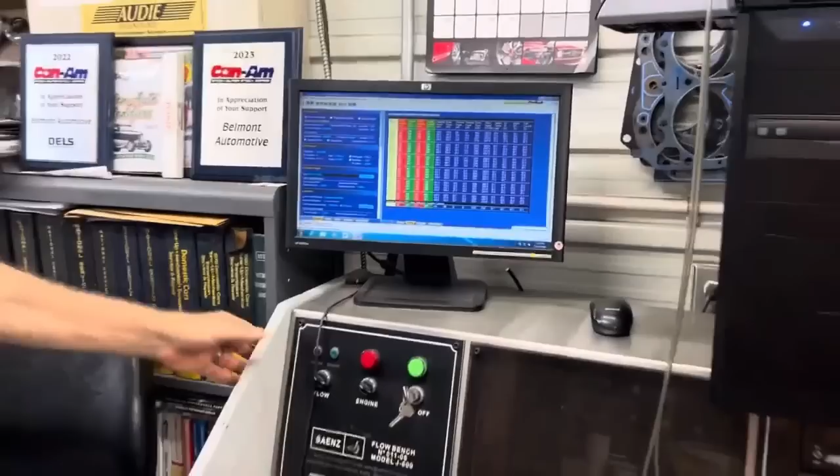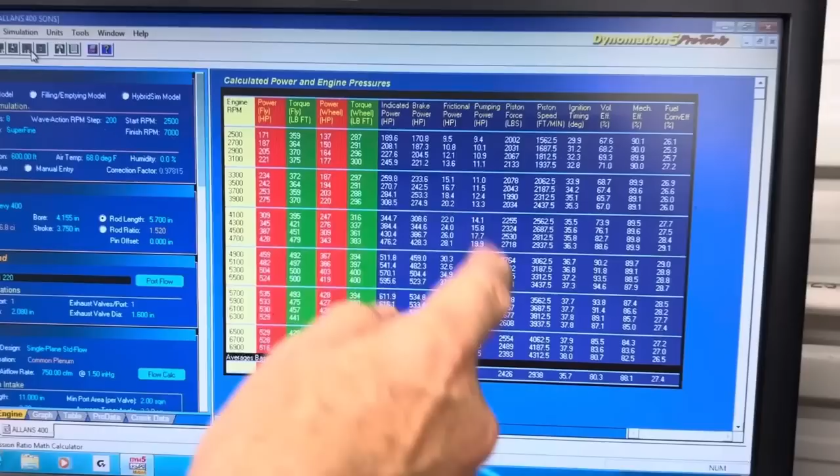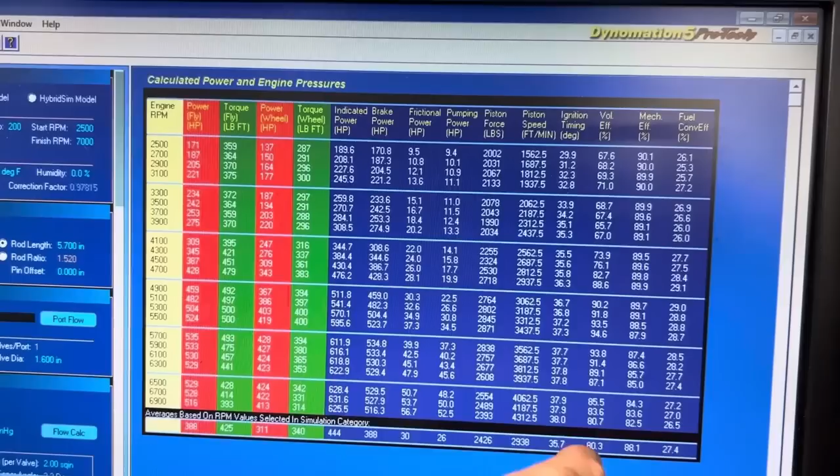So that's the Dynamation program. As you can see, you have your power and your torque, indicated power, brake power, frictional power, pumping power. That's how much it takes for the engine to actually pull the mixture in and push the exhaust out.

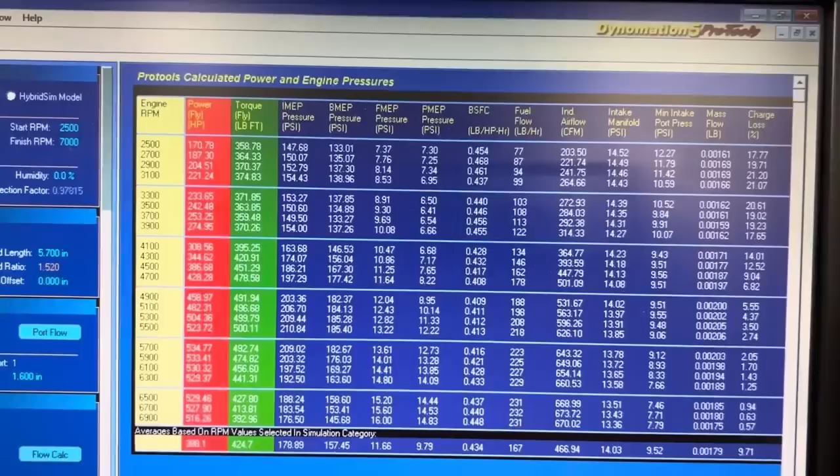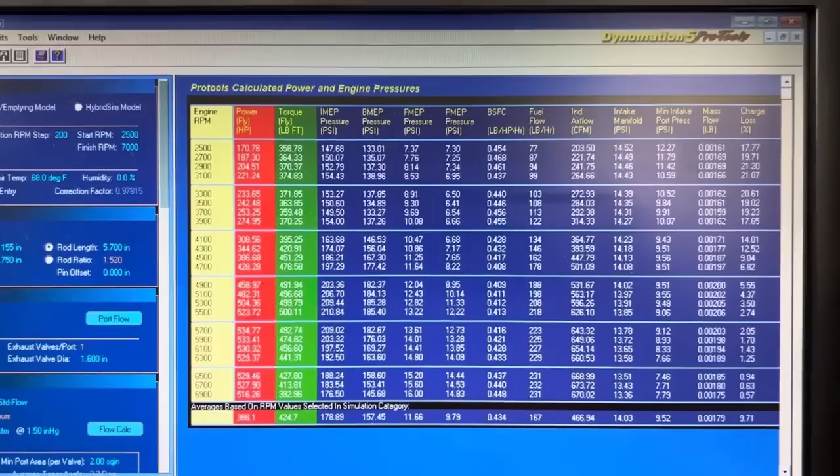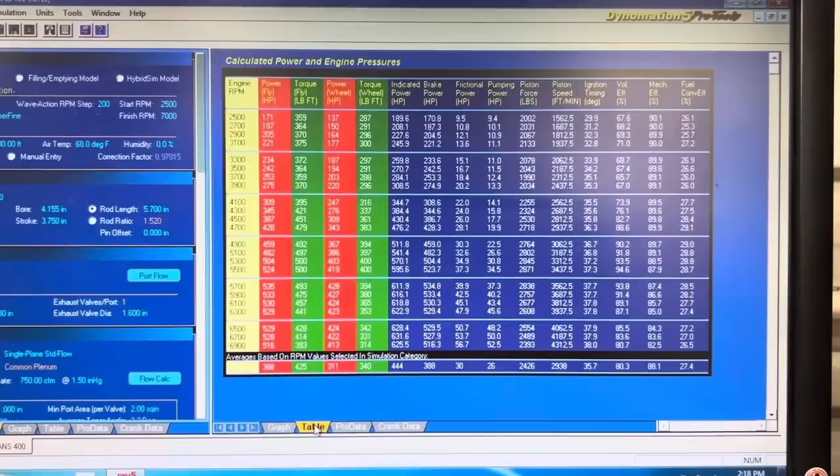This program also will give you a graph. I did this for Allan's son's motor, and there's a graph right there. My Dynamation program said it would make 535 horse and 500 foot-pounds of torque. The horsepower is off a little bit, and I think we made more torque - 525 or 530. Yeah, the program isn't totally accurate, but it will give you a direction which way to go.

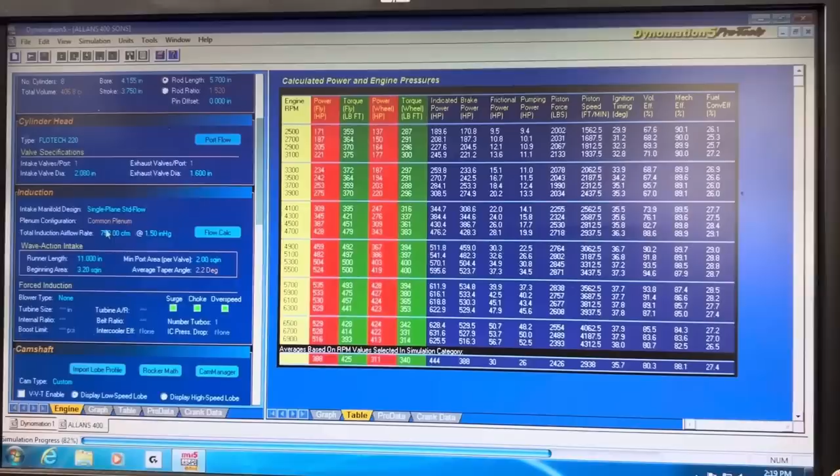You can put the weather in here, the elevation. Let's scroll down here a little bit. You can put the cylinder head, port flow in there, the valve sizes. What else we got here? Carburetor size - they have a whole bunch of different intake manifold options.

Intake runner length, beginning of the intake runner area, minimum port area, which is very important, and the taper angle. That'll give you a taper angle. It even does forced induction if you want.

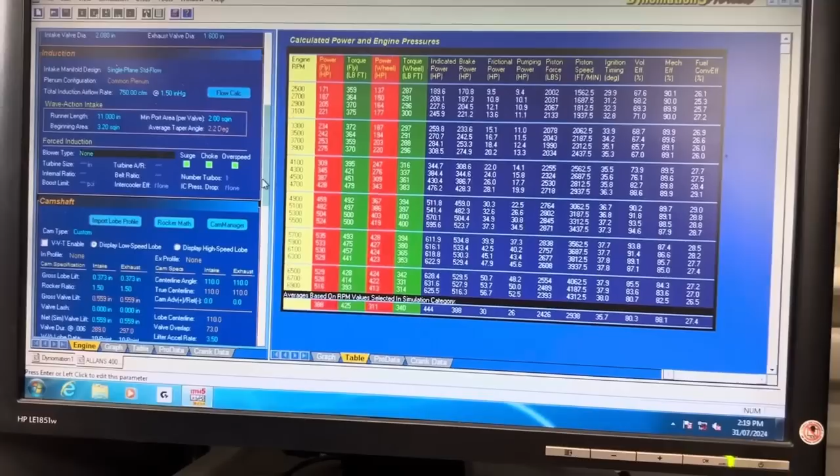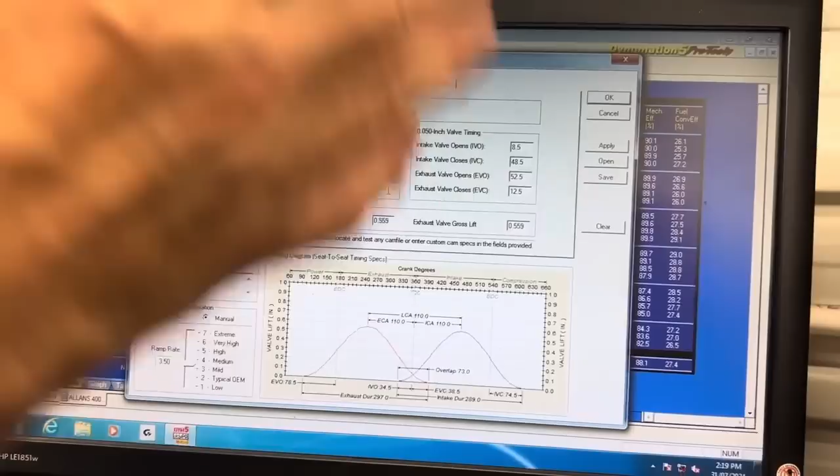Bunch of camshaft stuff. So there's a cam manager in here, and you can go to valve event timing, and it shows you the seat. I always go seat to seat timing. Just forget about the 50 thou numbers, because the engine sees seat to seat - it doesn't know. Exactly. So intake valve opens, intake valve closes.

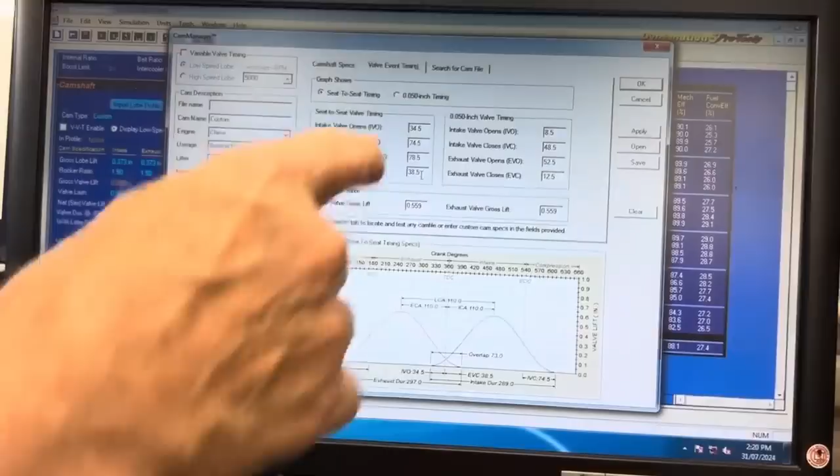You can move these numbers all around, and if you move them around and find more power by moving them around, you will come up with a lobe separation. So you don't start with a lobe separation. You start with doing what the engine wants in the opening and closing numbers, and then you end up with a lobe separation. You have your lift.

Here's a graph that shows the overlap area here. You have to know the estimated lifter acceleration. You can go auto calculate and it'll do it for you.

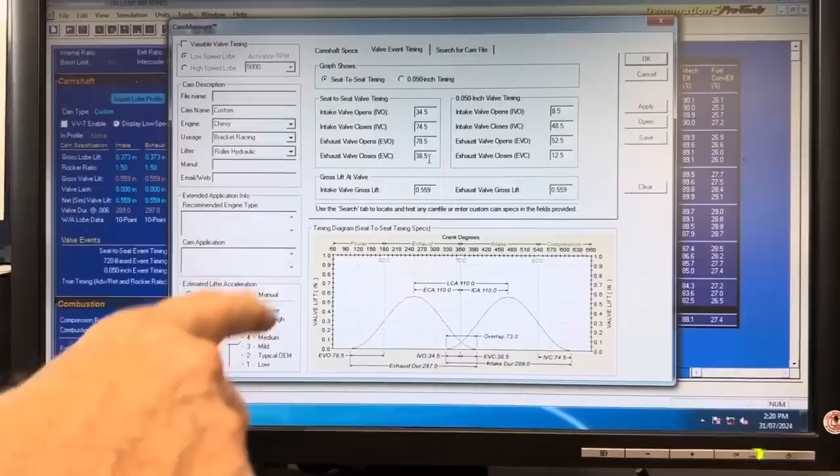The only problem is sometimes with some cams, I can take my cam doctor files and put them right in here. If you're doing this just by numbers, sometimes it'll be more aggressive and you'll pick up power, and it's not necessarily the opening and closing number - it's the aggressiveness of the lobe. So I put it on manual a lot of times when I'm trying to figure out the opening and close numbers.

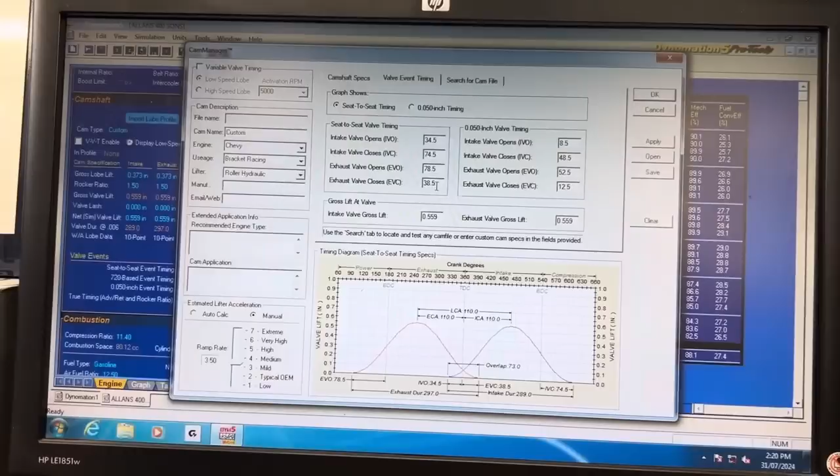I've been using this program - I bought the first one back in 2000. It was a DOS program, and I bought this one in 2007 or 8, I think. So I've been working with it a long time, and it is accurate if you put the right input in.

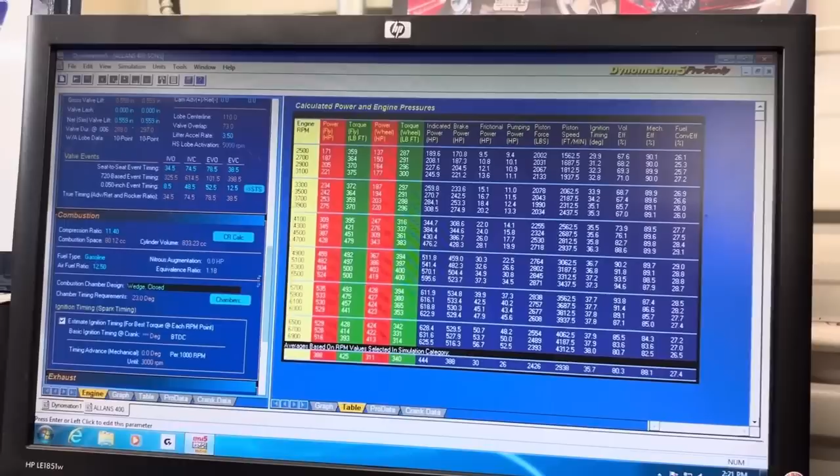You can also put in compression ratio, the gasoline you're using, the type of combustion chamber, and then you have all your header stuff here - header length, inlet diameter, exit diameter, length, the collector diameter, and it'll come up with a pretty accurate number which way to go.

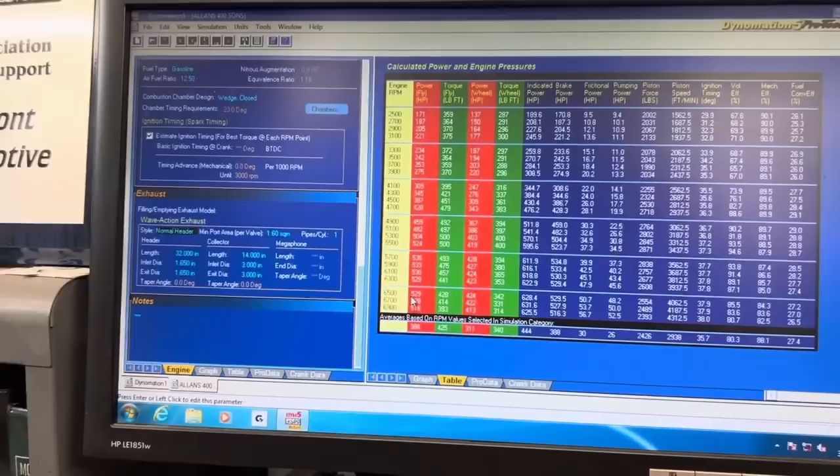Computers are wonderful. We need to use them, because in the old days we never had anything, and a lot of it was guesswork back in the early days.

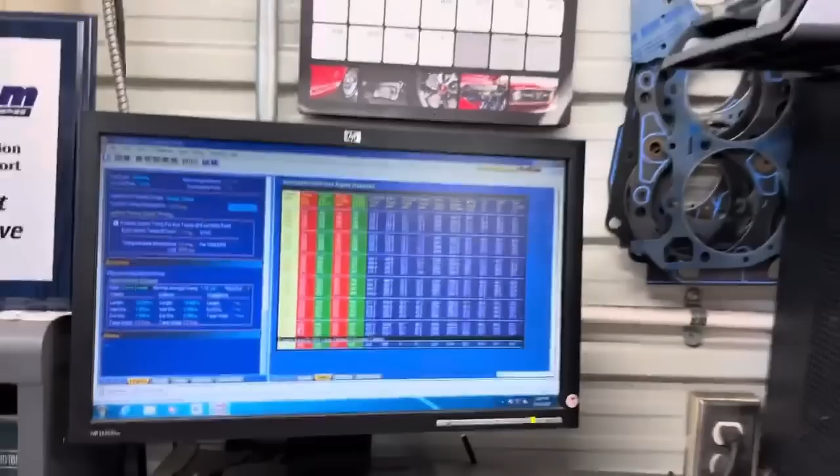So that's a cam a year, and I finally settled on something that worked, and it wasn't what the cam designers or the cam people told me I needed. It was far from it. It just shows you how complex the process is.

Yes, somebody's trying to figure out in their head, yeah, I think I'll do that, right? Yes. And the cam guys want to sell you something that they know is going to work. Yeah, and it may not be the ultimate - take the safe route, right? It may not, yeah, exactly.

But I picked up a tenth and a half using this program for my cam. That's a lot in drag racing - a tenth and a half, so like almost 50 horsepower, right? That's a lot. Sure. Now I was going to get into this Crane book.

I have an old crane book here. This is going way back, okay. And if somebody has one of those, hang on to it, because you can pick your cam pretty easy that way. So the first thing Crane wants you to do is they show you here how to...

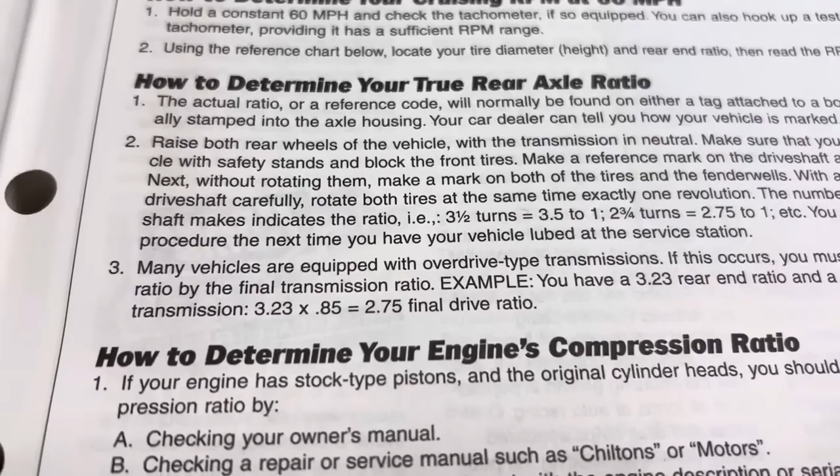Can you see this, Alex? They show you how to figure out your cruising RPM, your drive and rear ratio, and your engine compression ratio, which is what Alan was talking about. And it'll give you a cruise RPM here, and they even tell you how to find your rear axle ratio.

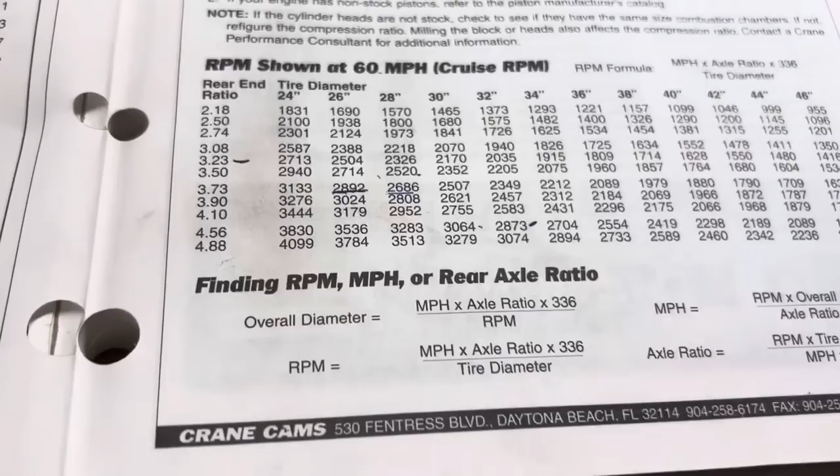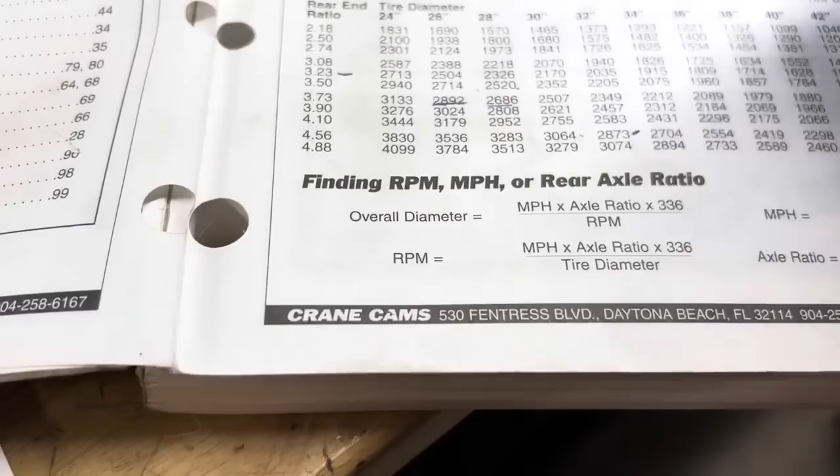So if you're building a car and say you have a 3.23 gear, and your tire is, say, 26 inches, 3.23... 26, am I on the right? So that's cruising at 60 miles an hour, you're at 2,500 RPM. Okay, which would make a nice street car driving it.

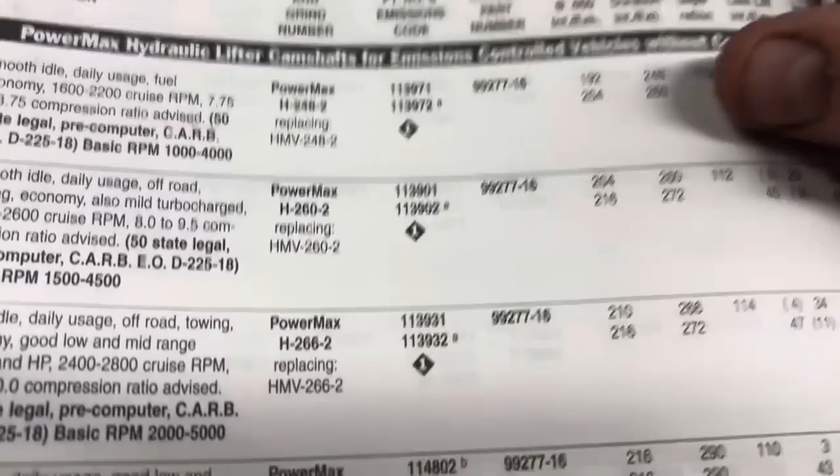So then you go into, if you have a small block, their camshaft stuff here. We'll do their Power Max camshaft. If you look in here, they start with the smallest cam, 192, 204 at 50, 248, 260 - that's basically a stock cam. Stock for a 300 horse, 350 cam basically. The basic RPM range is 1,000 to 4,000.

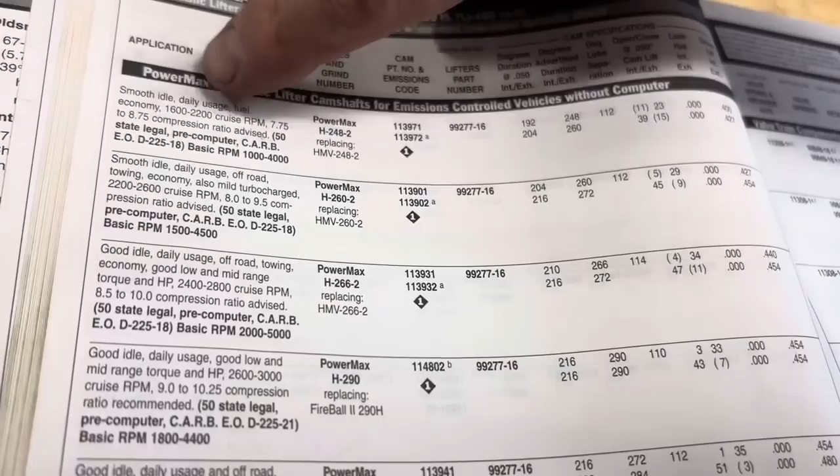Cruise RPM, 1,600 to 2,200. Compression ratio, 7.75 to 8.75. That's a good point - there's a point at which your motor's happy to cruise, right? It likes it. We go to Port Stanley every weekend for dinner, that's our cruise. So the motor, in my case, is at 3,000 RPM at 65 miles an hour. It just loves to be there, right? Yep, and this is what looking at your power range, your horsepower range, and that cruise RPM shows you.

I've actually never seen that number before. As you go down in cams, here's a nice 222, 222, and 222 - Alan said that's probably the start of what he uses. Cruise RPM 32 to 36, which is fairly high. 9.5 to 10.75 to 1, basic RPM range 22 to 52. That would make a very nice street cam. Yep, 450 lift, set of Vortec heads - that would be awesome. So this book, they did the homework for you, but people don't pay attention to it. Yeah, for sure. That's pretty cool. I've never seen that myself before.

If you can find - I think even Crane's no longer around, but if you can find a Crane book, you could probably learn a lot of stuff from that. Is Crane Comp now? I don't know who bought all the Crane stuff. I think Comp bought a lot of the Crane stuff, or Howard's did. Somebody bought all the Crane lobes.

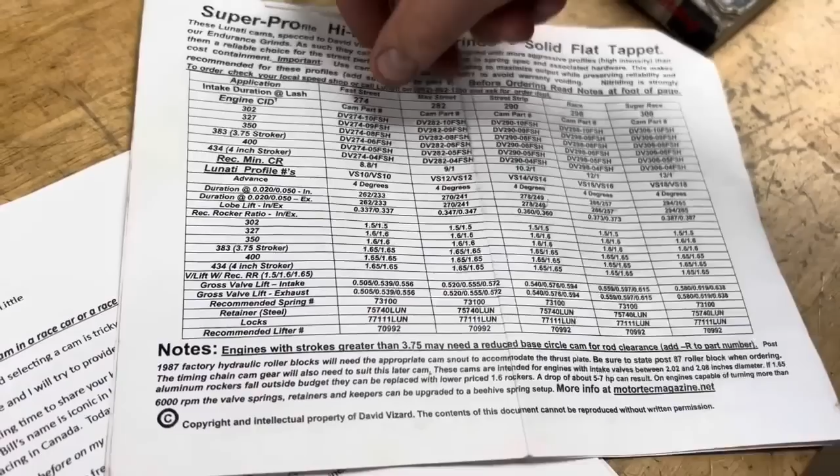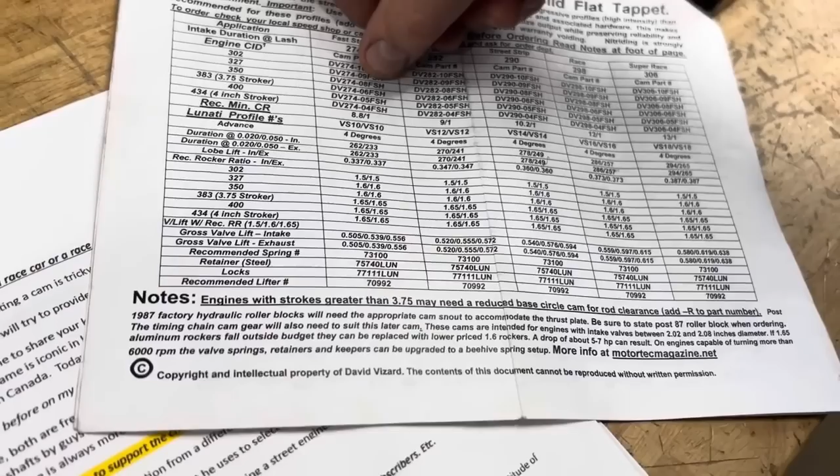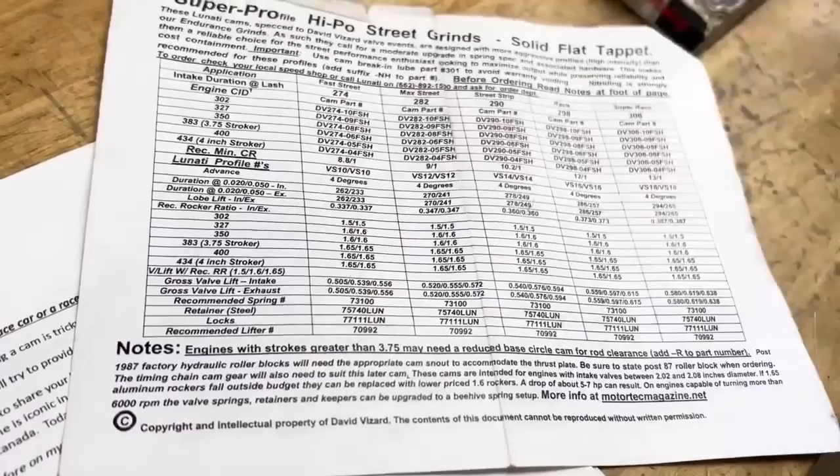You have your engine cubic inch size here, and you have your duration, your lobe lift. So fast street would be probably if you had a nice street driver - say you had a 302 cubic inch, 274 on a 10. If you had a 327, it's 274 on a 9, 350 on an 8, 383 on a 6, 400 on a 5, and 434 on a 4. So you can see how the overlap changes with the cubic inch, and that is the correct way to pick a camshaft. He shows you the advance that you need.

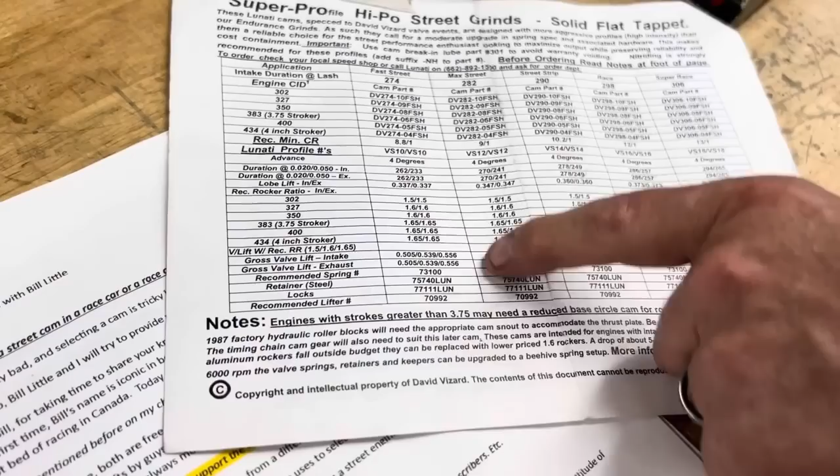These are all single pattern cams, I believe. The advertised duration, the valve lift, it's all shown here. He has 3 different valve lifts depending on if you want mild, medium, or real high performance lift. The rocker ratios are included. That goes all the way up to super race cams, which is fairly accurate. You end up with a cam at 294, 265 - that's a pretty healthy camshaft, right? So that would work good in probably a 350 drag motor.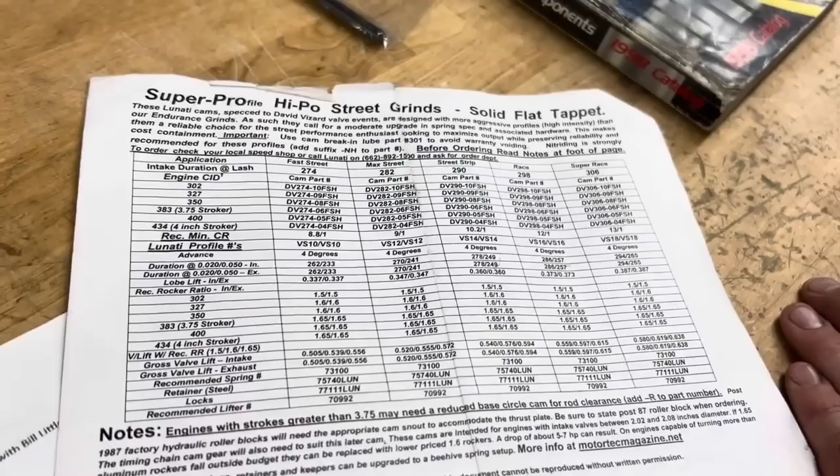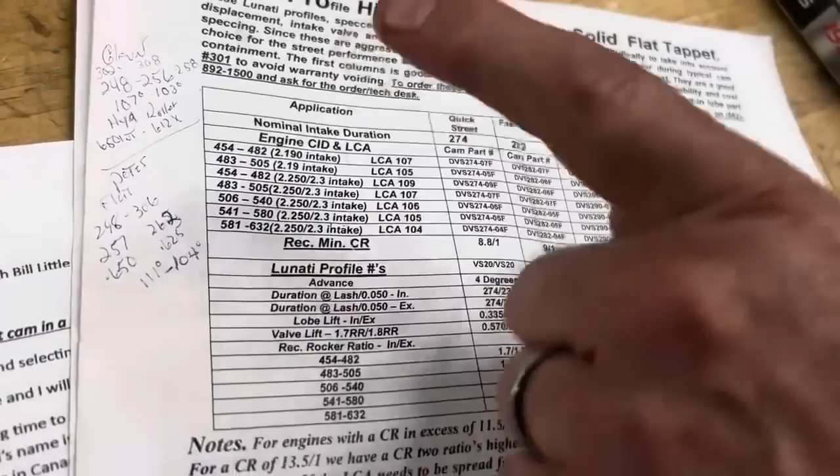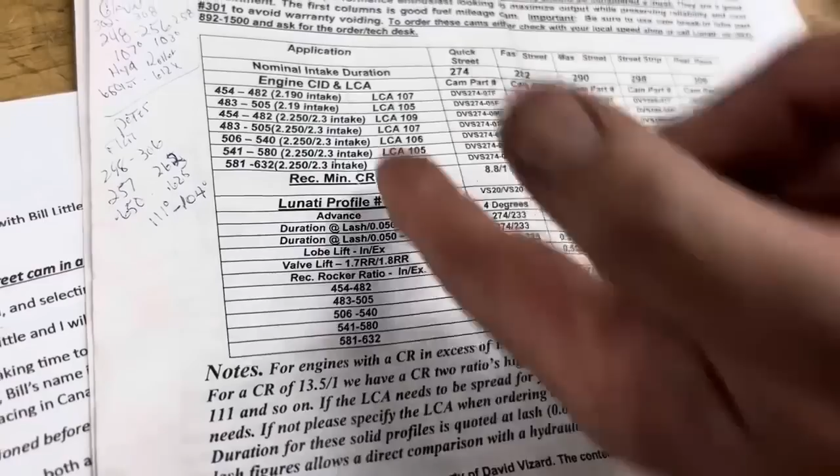So that's for the solid flat tappet. And then he has - excuse me, what is he - okay, so these are more for the big block. That was all small block stuff. And then you get to the big block stuff, and he actually shows you valve sizes here. As you go up in valve size, like 2.190 intake, lobe separation 107 - if you have a 454, 482, 483, 505 - you can see how that all changes as the engines get bigger. When you get up to the 581, 632s, lobe separation of about 104. There's going to be a lot of people that's going to argue about that.

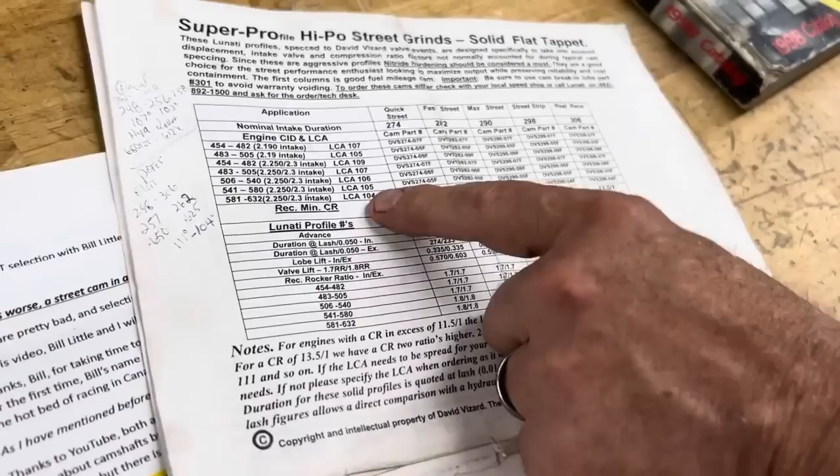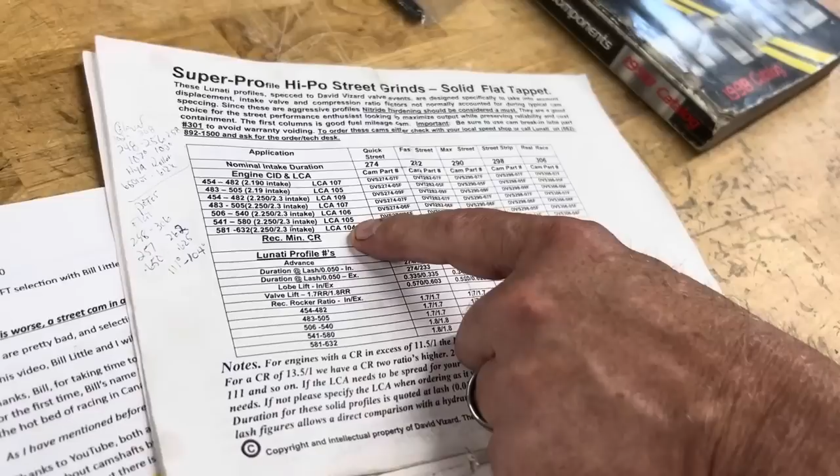These are for the street, remember, not for race, and it's for 11.5 to 1 compression. If you had more compression, that would change a lot of this stuff. David explains a lot of that. For every half a point of compression increase, you can drop it 1 degree or increase it 1 degree lobe separation. So if you're 12.5 to 1, that's going to be quite a bit higher, or if you're 13 to 1, that's going to be higher still. So it's all shown here.

So between the Crane book and this, and my computer program, and some other cam books, that's how to pick a cam.

Good job, Bill. Once again, I'll come back to that.